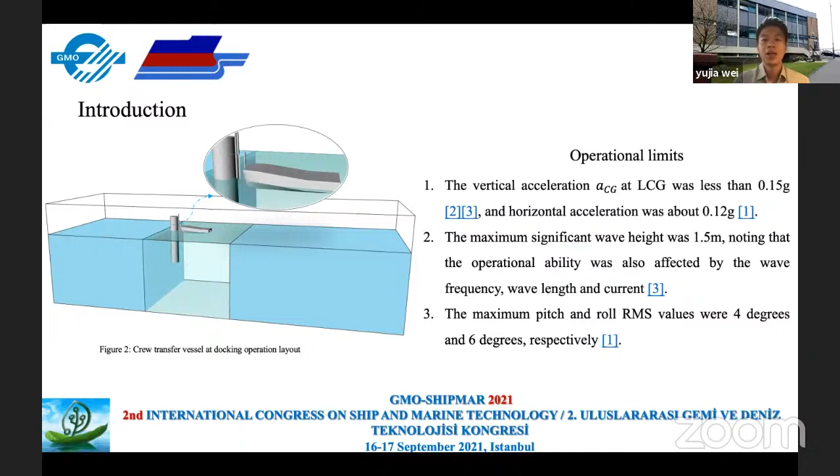So large motions, especially vertical accelerations of a ship, will cause serious accidents. In order to avoid that, some operation limits were cited by the classification societies. Three of them are listed. The first one is the vertical accelerations should be less than 0.15 gravity of accelerations. The second one is related to the wave conditions. The maximum significant wave should be less than 1.5 meters in practice. The third one, pitch motion and roll motion should be less than 4 degrees and 6 degrees respectively.

Here are the aims and objectives of this study: to use a numerical model to investigate the seakeeping characteristics of the crew transfer vessel in head seas. And afterwards, a verification and validation study will be presented to build confidence in the use of the numerical model. Then the critical working conditions will be studied.

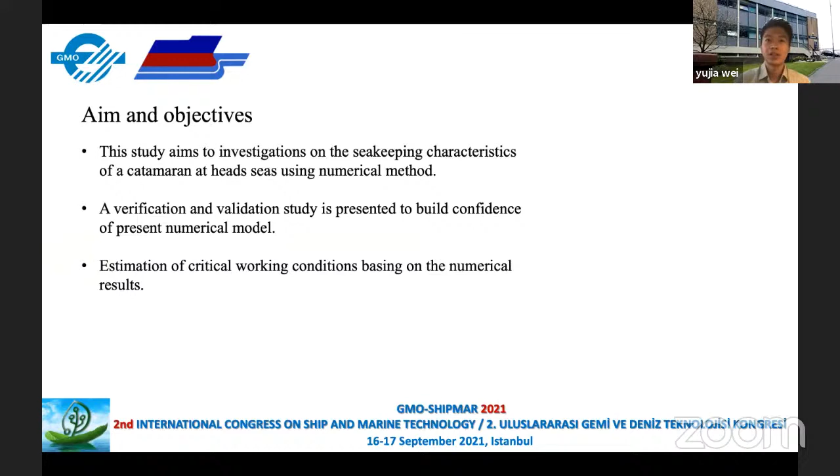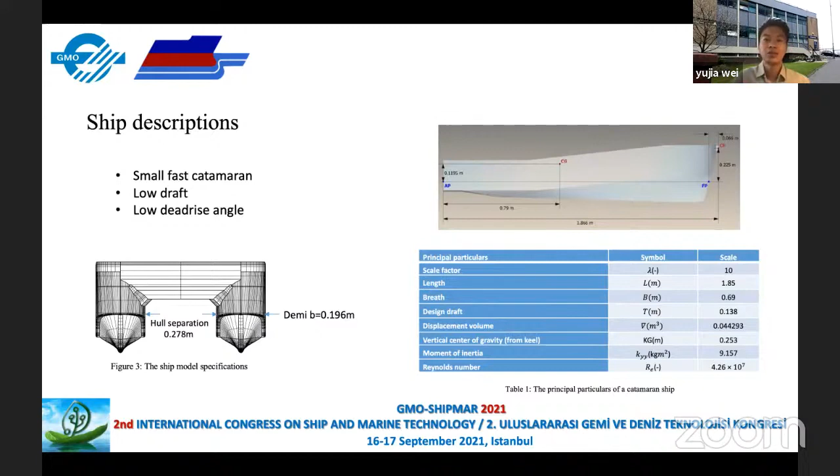First, I will explain the ship. In this study, we use an 18.5 double hull catamaran with low draft, to reduce the resistance to support the fast transportation ability. But the fast speed and low deadrise angle will cause a slamming phenomenon and will further violate the ship motions. To achieve the geometrical similarities, we need to make sure all the length measurements for the model and the wave have the same scale ratio between a full scale and the model scale. The Reynolds number in this study is quite high, so a turbulence model is implemented.

The numerical method we use is based on the finite volume discretization to solve the incompressible Navier-Stokes equation as shown in equation 2. And we use the volume of fluid technique to capture the air and water interface shown in equation 1. The symbol alpha, when it's equal to 1, represents water. When it's equal to 0, it represents air. And in between, an interface will exist.

Equation 2 and equation 3 will be solved to create a momentum pressure predictor by solving the matrix, using different numerical schemes, and those things can resolve the flow field problems. The hydrodynamic forces can be calculated by integrating the flow force and the wave force onto the structure surface, and then by solving the ordinary differential equations shown in equation 4. So for the fluid solver, we use waves2Foam.

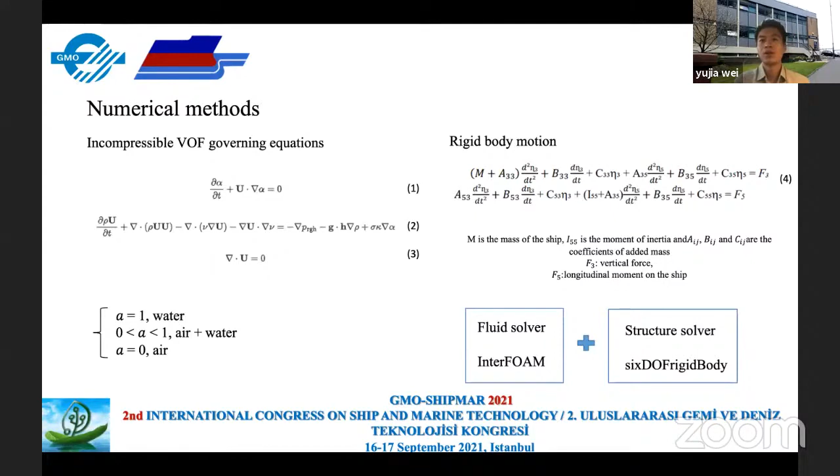For the structure solver, we use a 6DOF rigid body solver, and for each time step, this loop will repeat until convergence is achieved. For the computational wave domain, it's very important to provide the boundary conditions for solving the differential equations. We summarize the boundary conditions we use and change the parameters according to the turbulence model.

The wave domain size was regulated by our fluid solver waves2Foam, where we use one wave length in front of the ship bow and 1.5 lengths away from the ship's stern. For the lateral boundary, we left at least one ship length away to avoid wave reflections.

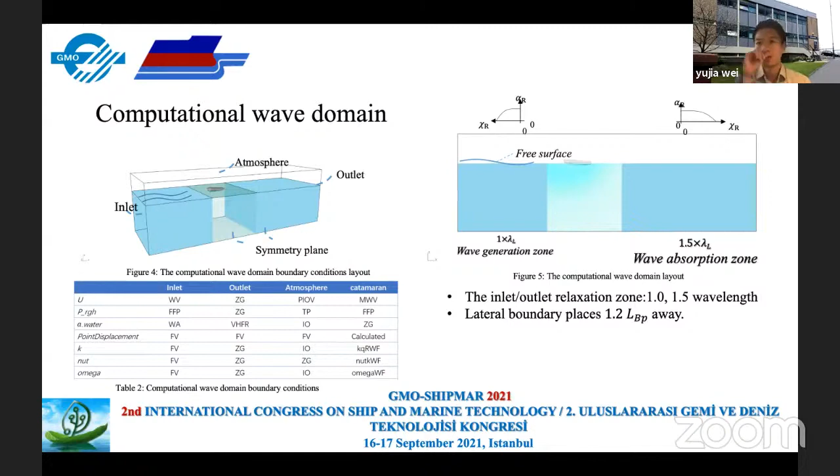Wave generation is quite an important factor for wave structure interaction problems. In this study, we use the Stokes second-order wave. Its equation is shown in equation 5. We use this because of the accurate wave amplitude plus the consideration of nonlinearities.

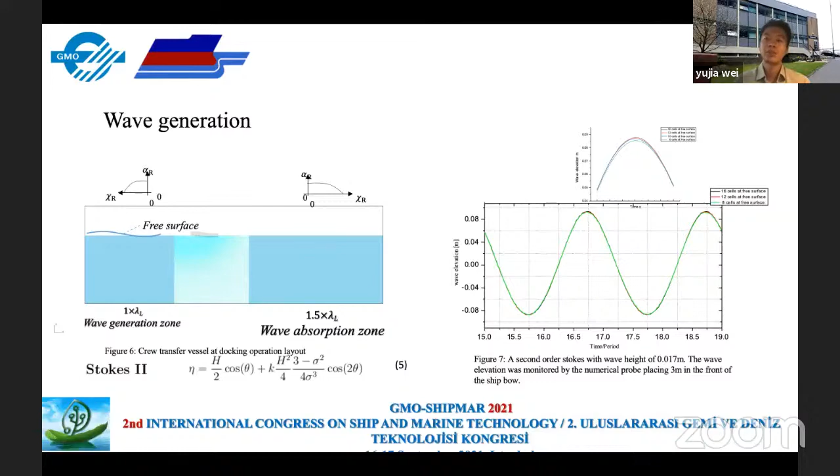A mesh convergence test was presented here. We use 4 different mesh densities, and the results show that the medium mesh, where we divided the wave height into 12 cells, has a good accurate result and also balances the computational cost. So we use this mesh density throughout our cases.

The mesh was created using the default OpenFOAM mesh generating tool, snappyHexMesh. It uniformly cuts the background mesh and refines some important regions, for example, the free surface and the flow surrounding the structure zone. Then those cells will be snapped onto the structures.

Because in this case we use the k-omega SST turbulence model, we have to pay attention to the y plus value. We keep it in the log region, which fluctuates around a value of 50. Every simulation was run on the Archie-West HPC with 40 cores. The constant time step we choose is 0.002 seconds. Each case needs 5 days to solve up to 30 seconds for a stable result.

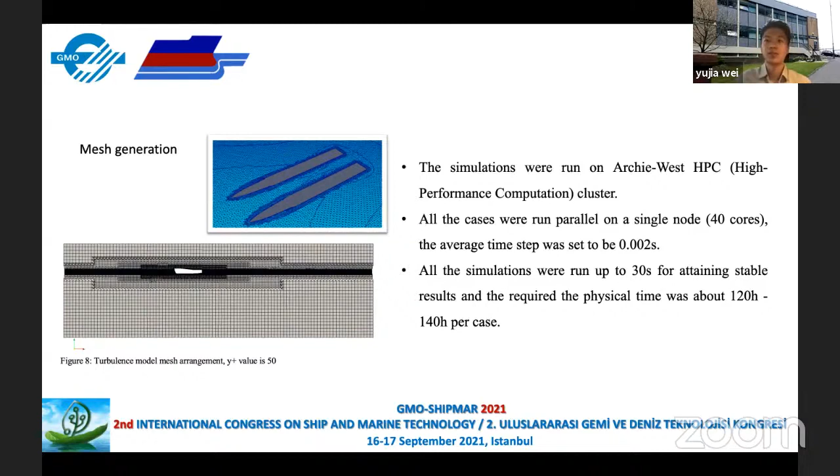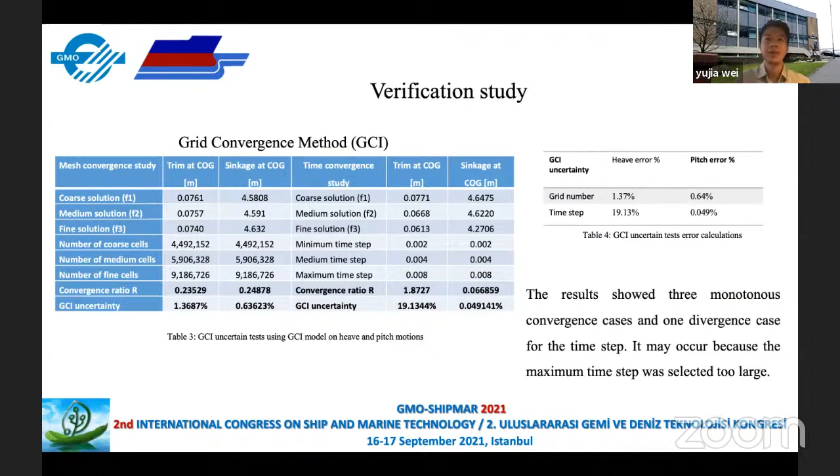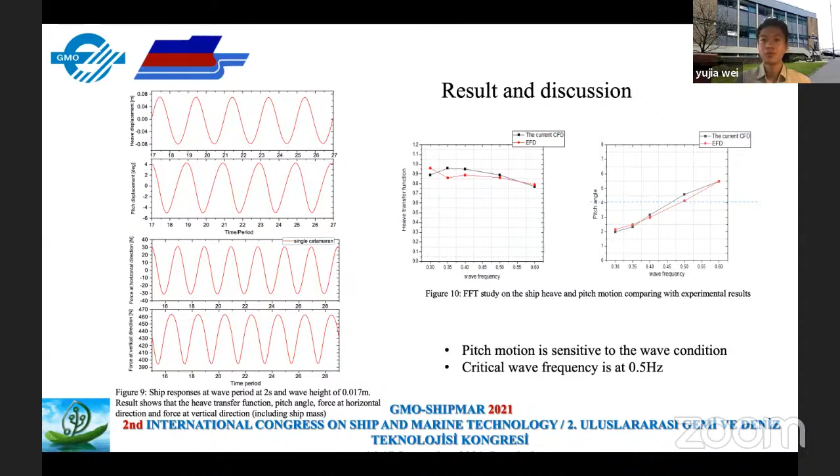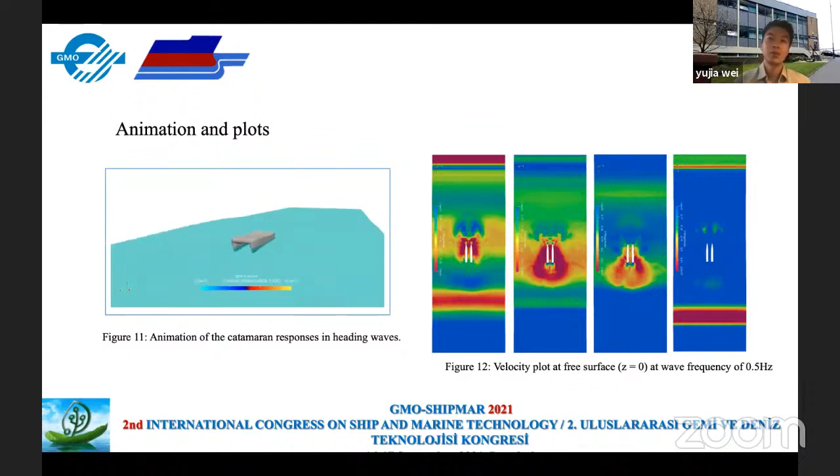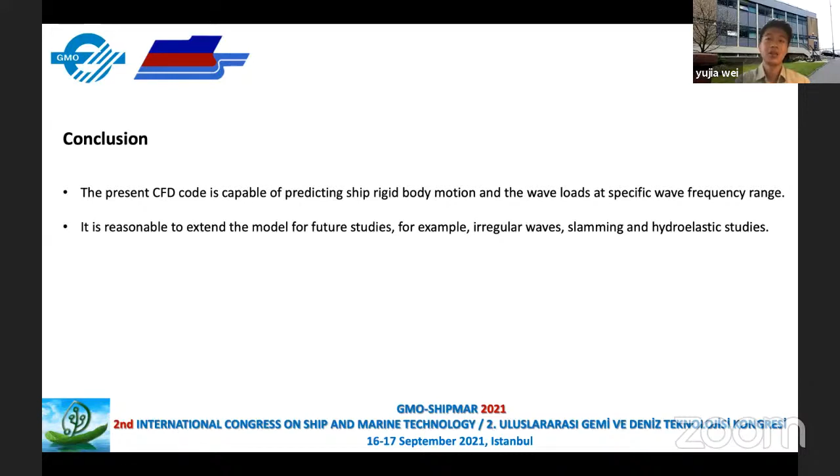Thank you very much, Mr. Wei. It was a very nice presentation, and the results were charming as well. I believe they are in very good agreement with the experimental studies. I know it's not easy to overcome this kind of problem in CFD, because you have to deal with all sorts of grid generation, convergence and other problems, and it takes quite a lot of time, even if you use many cores, such as 40 in your case. But I think it's a good job. Thank you very much for this nice presentation.